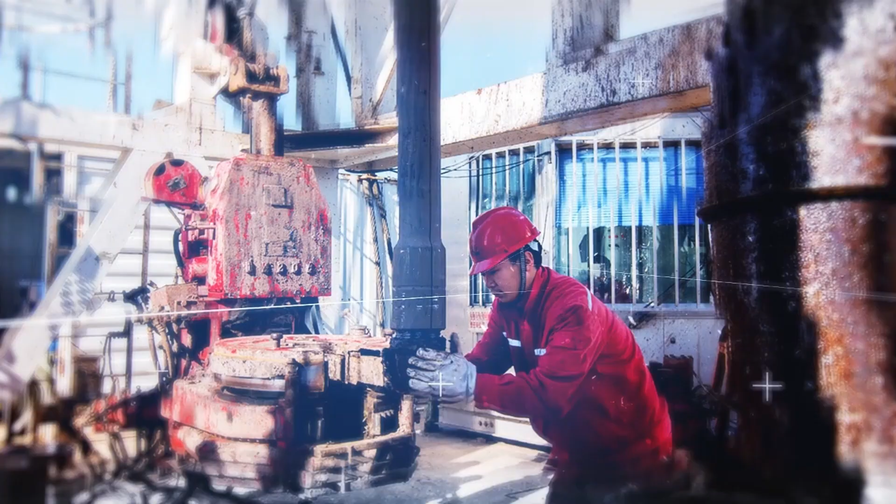Carbides are applied in industries from natural gas exploration to woodworking to snowplow blades. This vast array of applications have one thing in common: they require their carbides to operate well in many tough conditions.

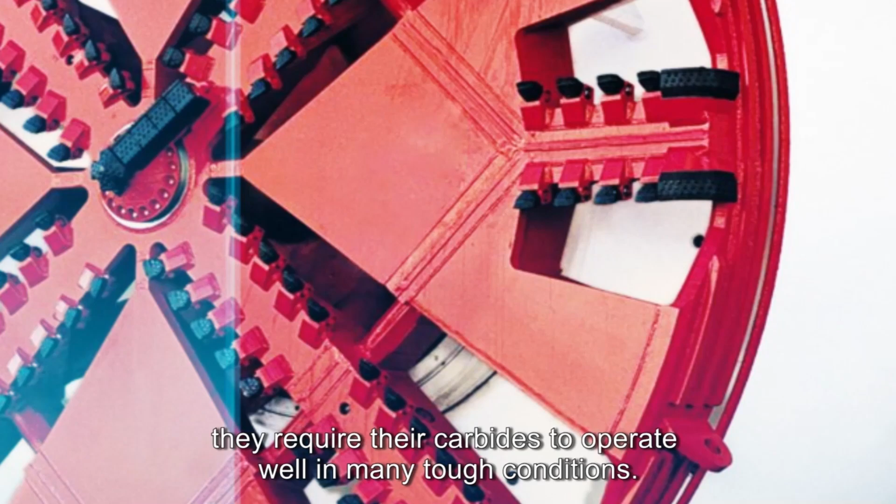For great quality cemented carbides, please come to JIMS. We are one of the first manufacturers in China to produce cemented carbides, focused upon the development, manufacture, and sale of both cemented carbides and related products.

The company was established over 4 decades ago and has achieved great success. This quality experience has allowed us to develop unrivaled expertise in this field. We currently operate the largest cemented carbide production base in the northern part of China, backed by a workforce of over 600 employees and more than 300 diverse processing equipment sets, with an area of around 48,000 square meters.

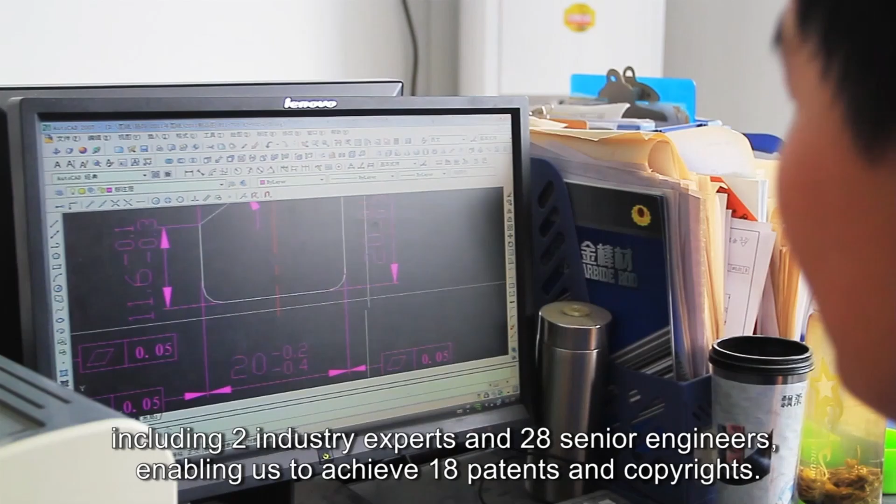Our company is located in Jinan city of Shandong province. We are strategically positioned to develop technologies with robust R&D capabilities. Our technology center is home to more than 200 skilled technicians, including 2 industry experts and 28 senior engineers, enabling us to achieve 18 patents and copyrights.

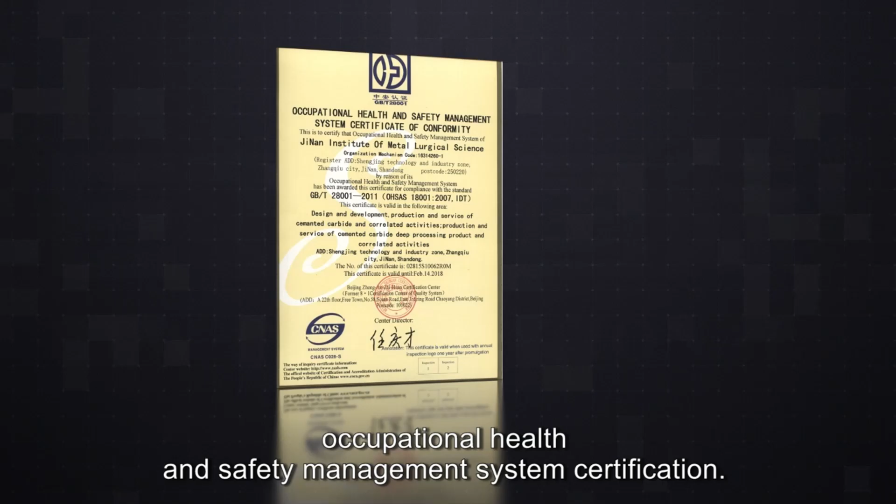Our company has numerous certifications, including ISO 9001 Quality Management System, ISO 14001 Environmental Management System, as well as the OHSAS 18001 Occupational Health and Safety Management System certification. Our Qilu brand cemented carbides have been widely applied in various industries, such as machinery, metallurgy, and mines, etc.

Now let's have a look at our manufacturing base. Our total annual production capacity has expanded to more than 2,000 tons of cemented carbides.

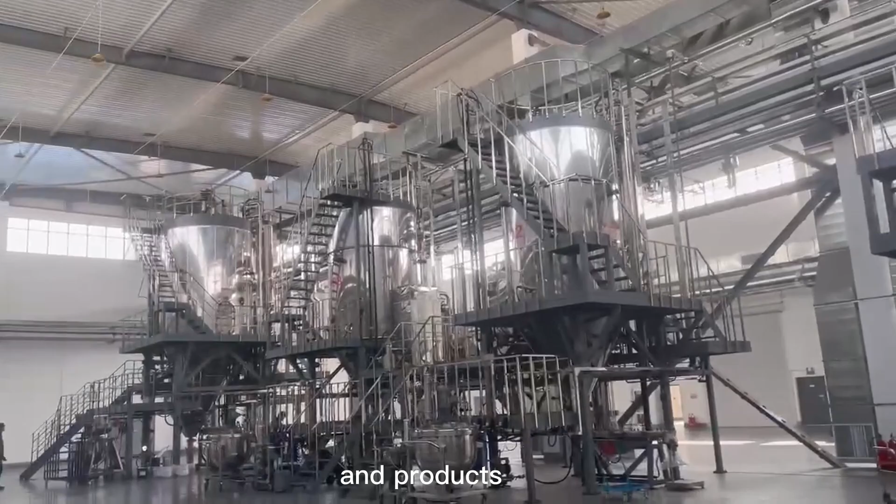We boast an organized and efficient production line from the processing of raw materials to finished products. The manufacturing operations include powder preparation, compression molding, extrusion, low pressure sintering, grinding, quality control, and testing procedures.

We can offer a complete range of cemented carbide products. Our quality carbide anvils can be used in the synthetic diamond industry. Our company has been the largest production base for carbide anvils in China over the years. The outstanding performance of our products is highly appreciated by our wide range of customers.

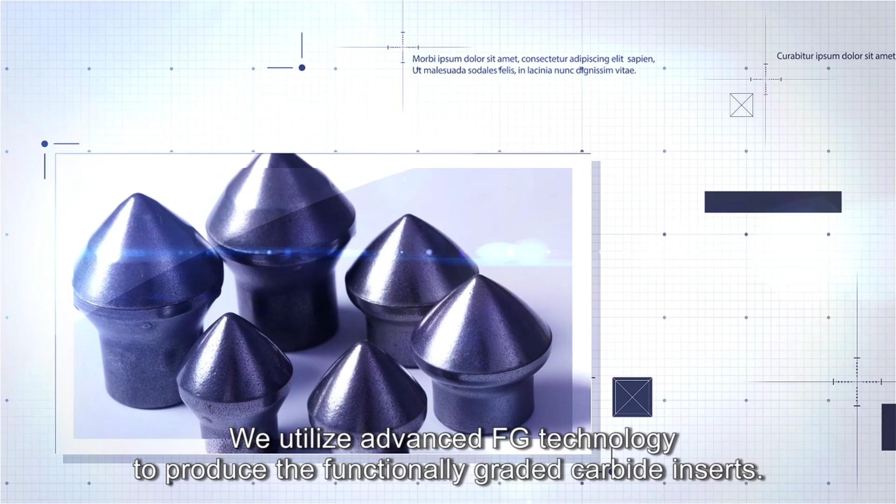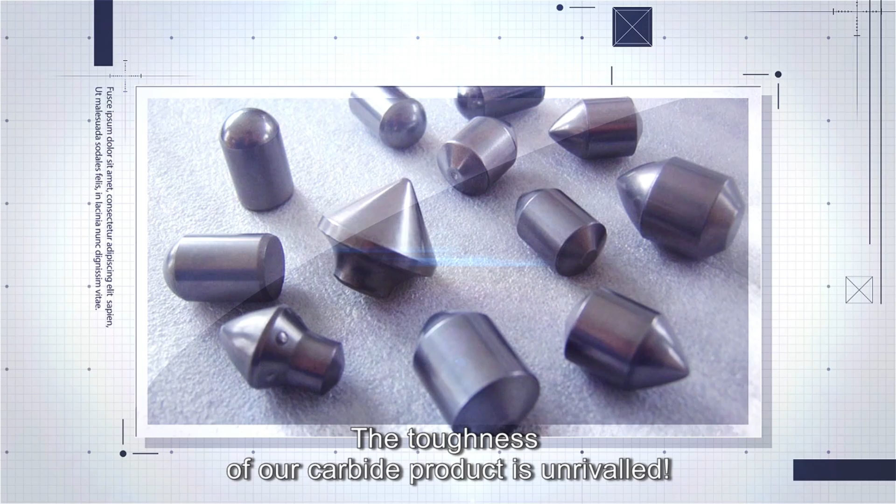We utilize advanced FG technology to produce functionally graded carbide inserts. This allows for a great increase in both lifespan and surface hardness. The toughness of our carbide product is unrivaled.

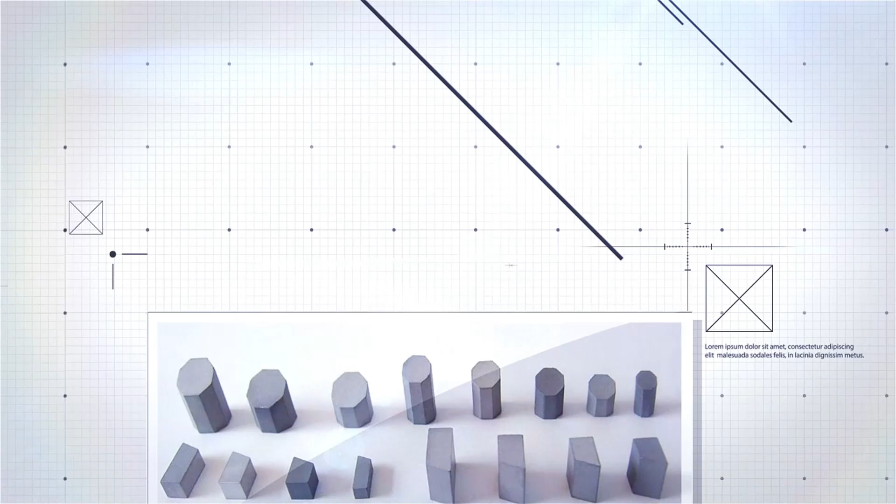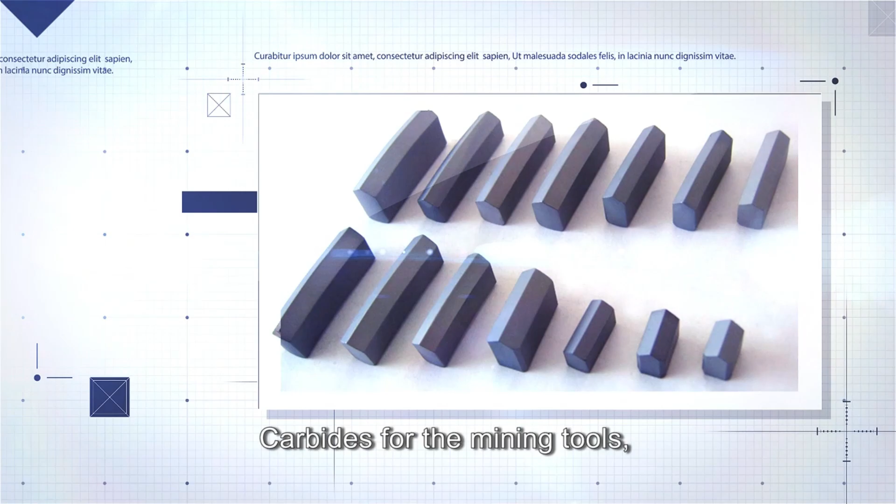Cemented carbides for oil and natural gas exploration. Tungsten carbide rods. Tips for geological exploration tools. Tungsten carbide tips, inserts for TBM cutting tools. Tungsten carbide burr blanks for woodworking. Tungsten carbide cutting knives and discs for metal cutting. Brazed carbide tips. Carbides for mining tools. Carbide inserts used in snowplow blades, and other high-quality cemented carbide products.

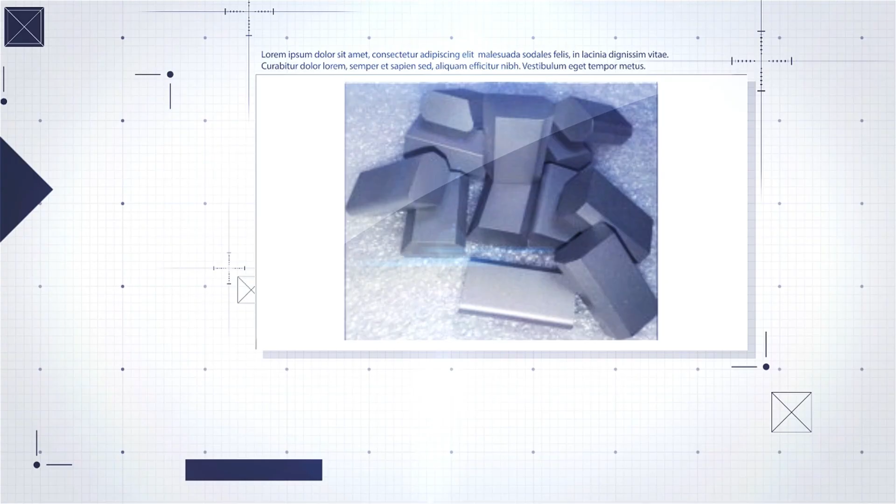Welcome global customers to visit our factory and gain a deeper understanding of our products and manufacturing techniques. You will find we run a meticulous production facility which produces high-quality products. Come to JIMS for the finest tools your mind can imagine.